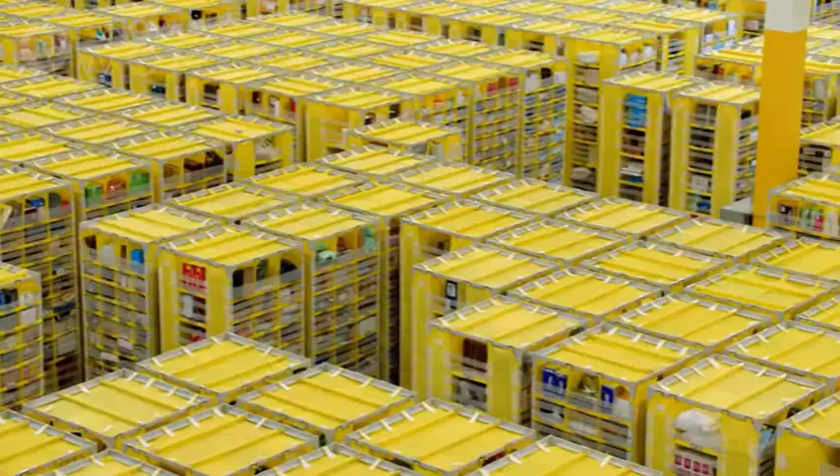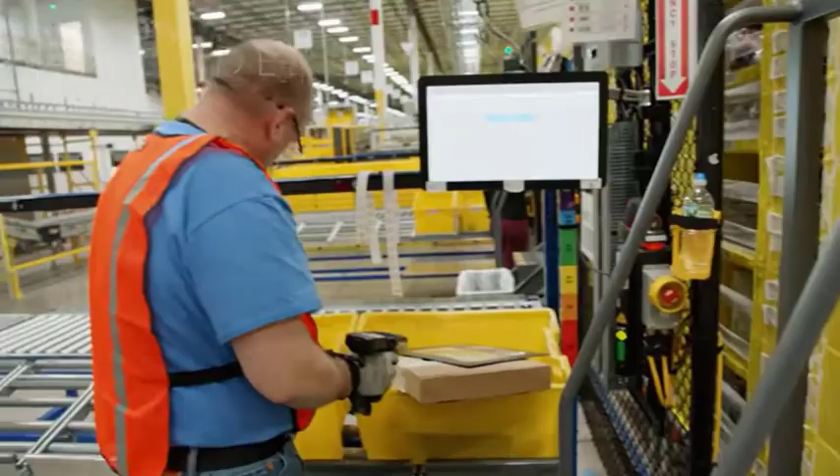To deal with that scale, Amazon has built an army of robots. Like a marching army of ants that can constantly change its goals based on the situation at hand. So our robotics are very adaptive and reactive in order to extend human capability to allow for more efficiencies within our own buildings. And there's plenty more where those came from.

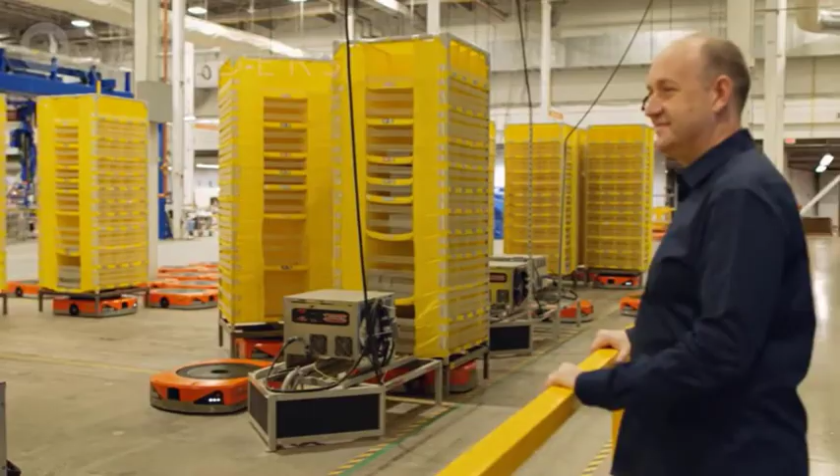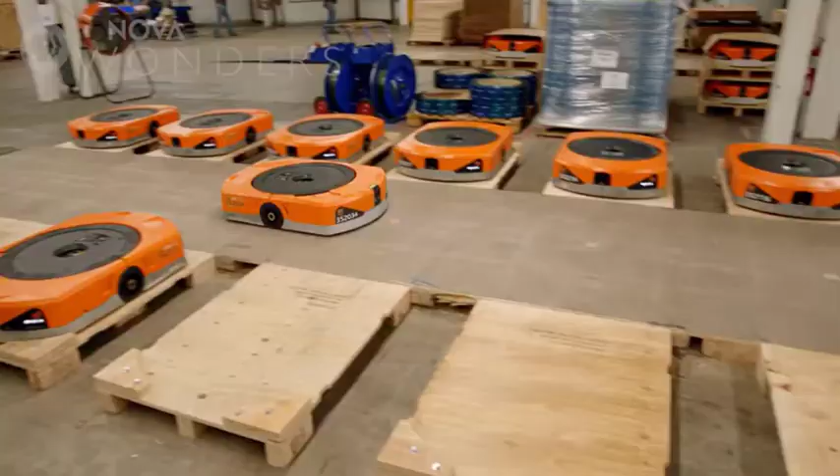Every day, this facility in Boston graduates a new batch of machines. All of the robots that you see moving the pods have been built right here in Boston. I call it the nursery, where the robots are born. They'll be built, they'll take their first breath of air, they'll do their own diagnostics. Once they're good, they'll line up for robot graduation, and then they will swing their tassels to the appropriate side, drive themselves onto a pallet, and go directly to a fulfillment center.

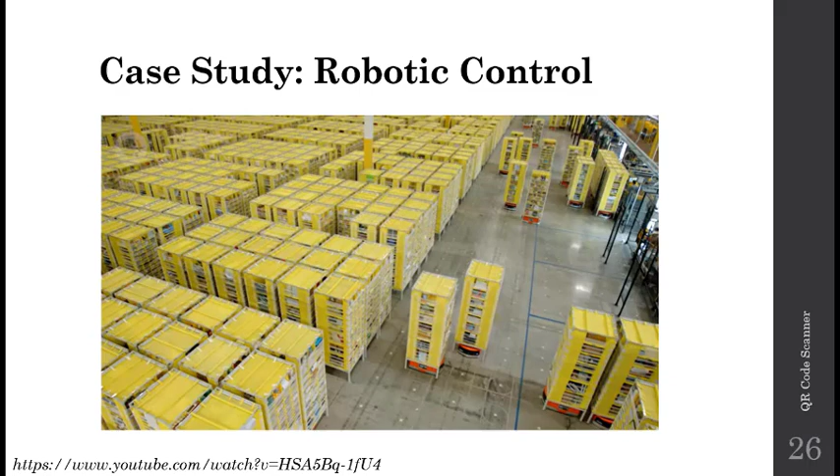You may have noticed in the preceding video, the floor of the Amazon warehouses are littered with these QR codes. It's the information encoded in the QR code that is read by each robot, and that information permits the robot to localize itself within the warehouse and drive the product from one area of the warehouse to the next. The ability of the Amazon robotic platforms to perceive the QR codes and utilize the information encoded in each is vital to their business model and the success of their warehouse operations.

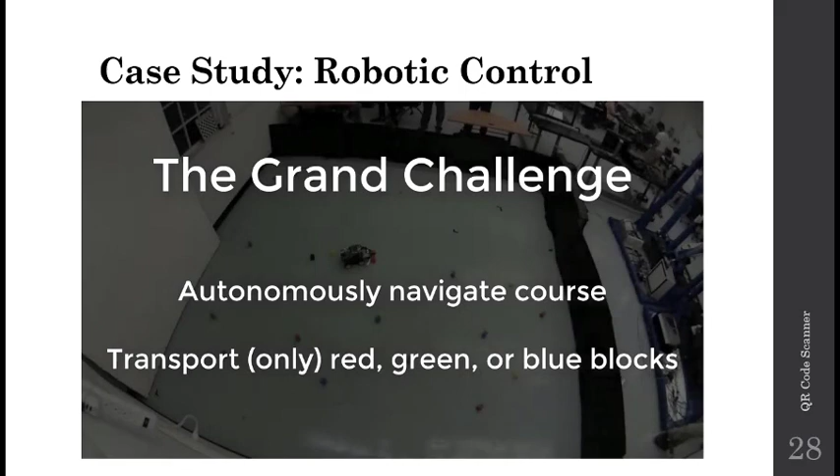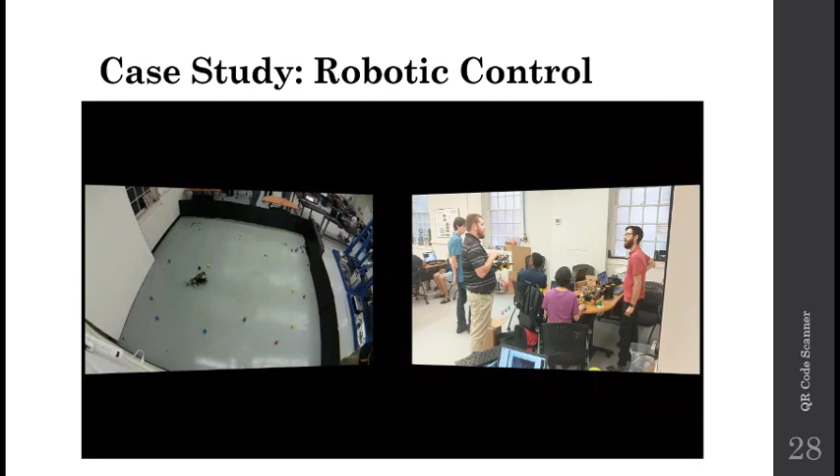Let's take a look at another robotic platform. Here I'm showing an overhead view of a small four-wheeled robot autonomously traversing a Grand Challenge course. This is the robot that is the focal point of my graduate robotics course. As part of this case study, we'll take a look at utilizing QR codes to control various aspects of this robotic platform.

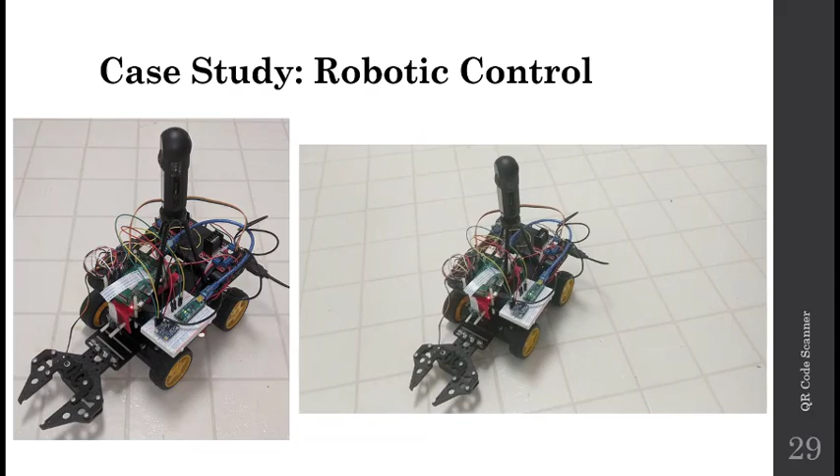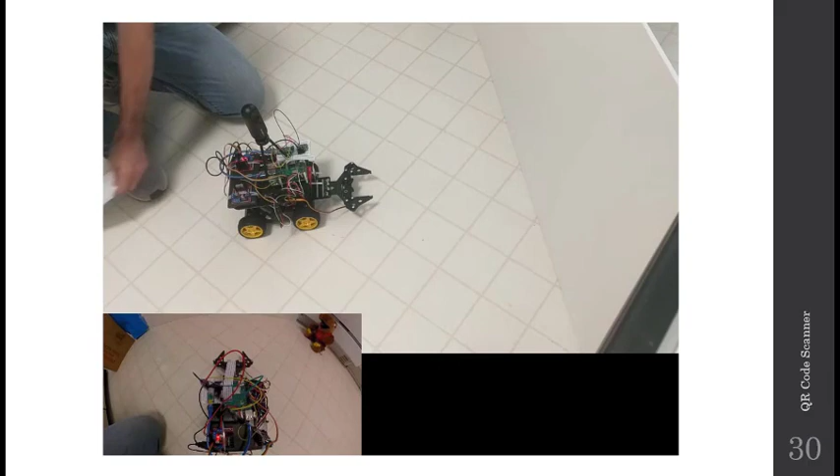Here I'm demonstrating the use of QR codes to control the position of the gripper. The camera connected to the Raspberry Pi in front of the vehicle perceives the presence of a QR code. The Raspberry Pi algorithm decodes the information contained within the QR code, and we use that information to command the servo motor. This in turn controls the position of the robotic gripper. Here I'm showing 3 different positions: fully open, halfway open, and fully closed.

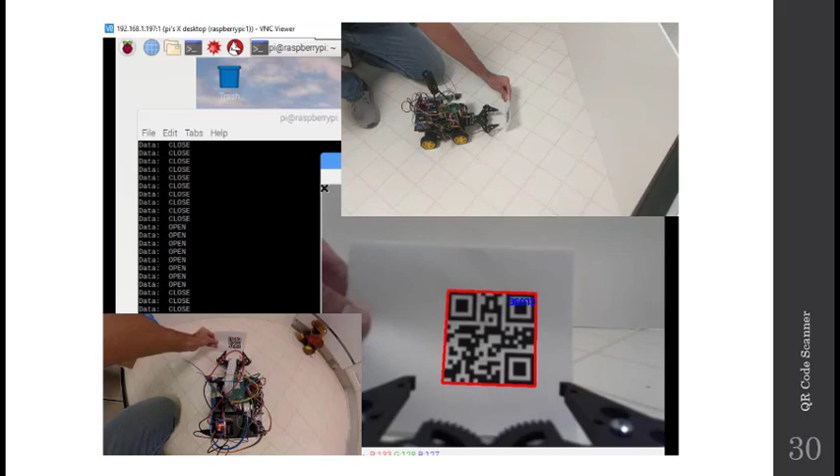Let's dive deeper into this control algorithm and take a look at how we're utilizing these QR codes to control the position of this robotic gripper.

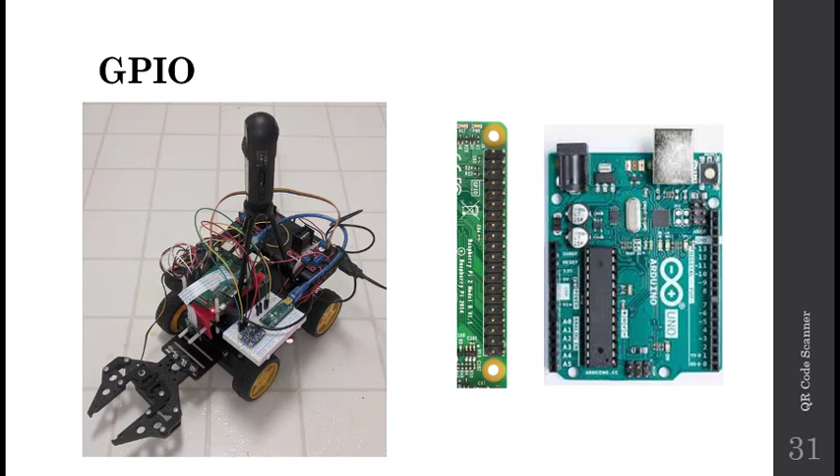The servo motor mounted inside of this robotic gripper is controlled through the use of the GPIO pins on our Raspberry Pi. GPIO stands for General Purpose Input Output, and you can think of them effectively as digital pins. They're either high at 3.3 volts or low at ground. These pins can be controlled by the user through software and enable a variety of applications, such as the generation of pulse width modulated outputs, I2C protocols, and serial communications.

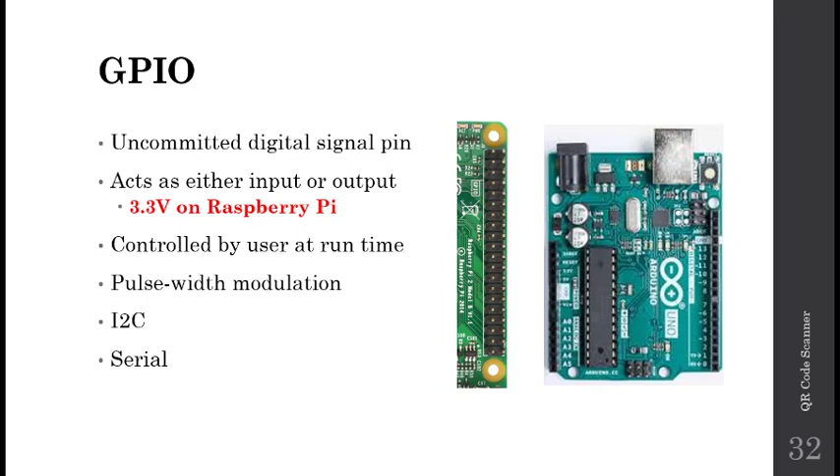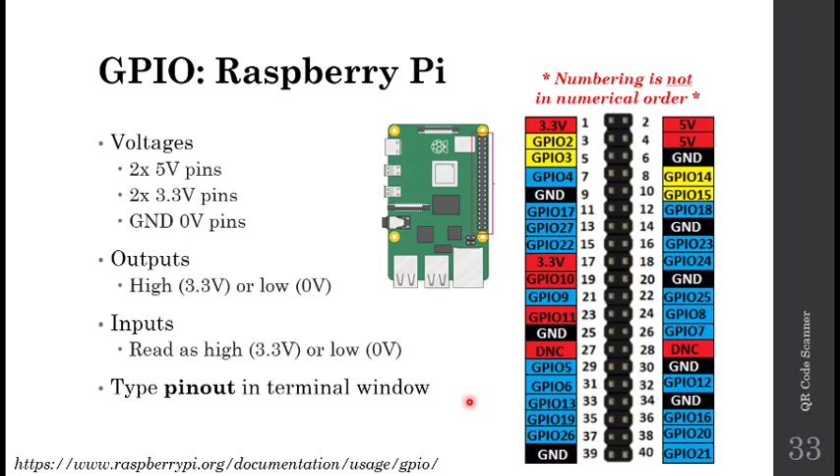For the details on this pin diagram, feel free to type pinout in a terminal window and hit enter. I'll also mention that a variety of hats are available for the Raspberry Pi GPIO pins. Here's a nice one that tells you the pinout diagram. You can just lay this directly on your Raspberry Pi and utilize this information.

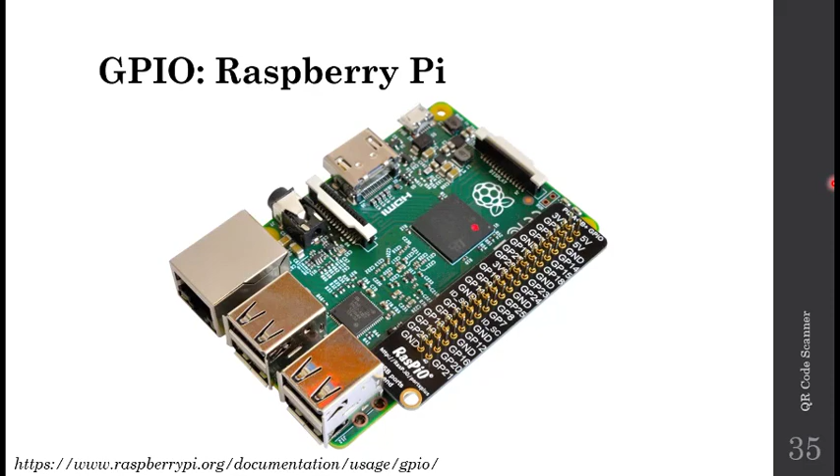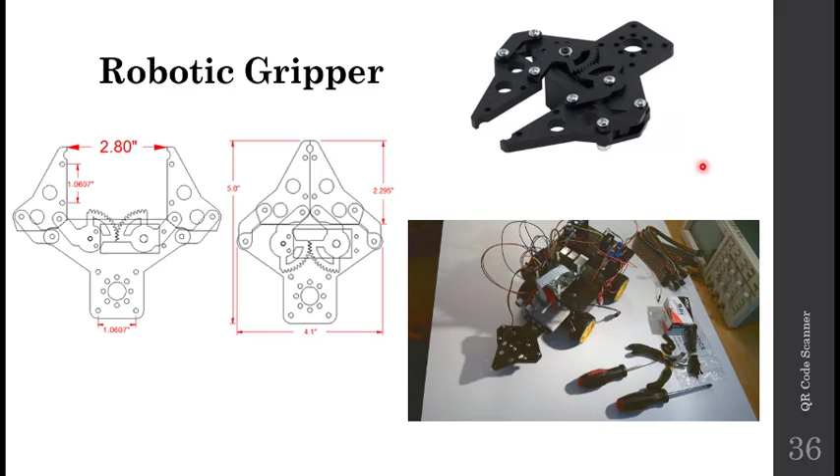The robotic gripper is composed of a standard servo motor along with a variety of 3D printed parts and attaching hardware. Here's a completed assembly of the gripper, and you'll notice based on these arms with geared teeth here, the position of the robotic gripper, this being fully open, this being fully closed, is entirely dependent on the angular position of the servo motor. So our ability to control the position of the servo motor allows us to control the state of the robotic gripper.

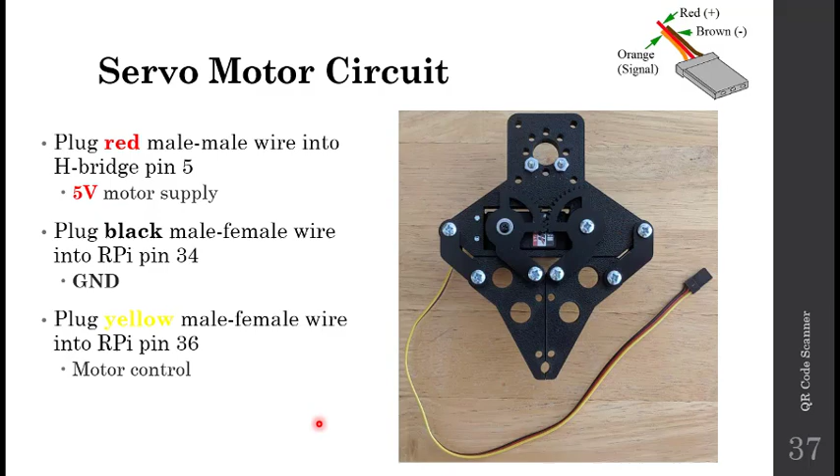Through the mechanical linkages of our robotic gripper, that will control the state of the robotic gripper. The control signal that we generate on the GPIO pin will be a pulse width modulated output. When it comes to the control of a servo motor, the primary aspect of the control signal we are focused on is the duty cycle.

The duty cycle of any signal is the time high divided by the full period of the cycle. It's very standard for servo motors to operate with a period of 20 milliseconds, so that'll be a 50 hertz pulse width modulated signal.

For this particular servo motor, a duty cycle of 5% will drive the motor to the full left position. A duty cycle of 7.5% will drive the motor to the full center position, and a duty cycle of 10% will drive the motor to the full right position. Now these are the numbers provided in the datasheet for this particular motor. We see that when we build the robotic gripper, due to tolerancing, each motor is slightly different, so we'll have to adjust these numbers accordingly.

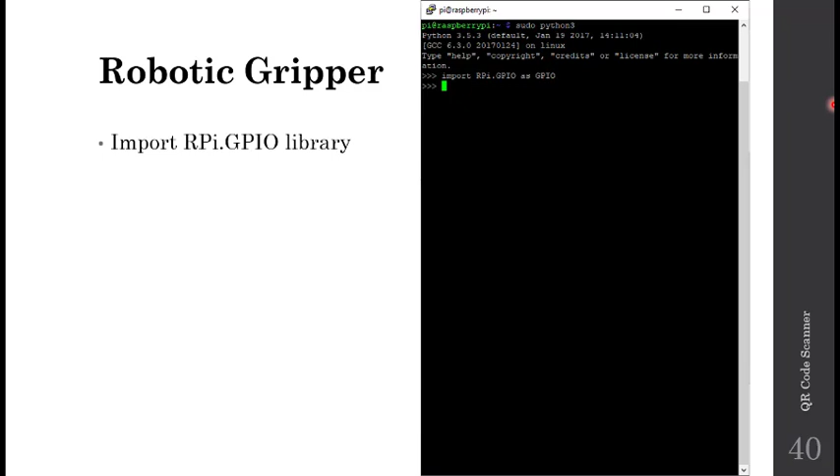With our robotic gripper assembled and wired, we'll enter a Python 3 shell and import the GPIO library. That'll be import RPi.GPIO as GPIO, this capital GPIO being the alias we'll use for this Raspberry Pi GPIO library.

We need to define the GPIO pin as an output that we'll be using to control the position of the servo motor. So on physical pin 36, I'll define that as an output. First, I need to tell the Raspberry Pi the configuration of the board, so I'll run a GPIO.setmode as GPIO.BOARD. That will tell the Pi to use the physical pins to denote the layout of our GPIO pins.

We'll then set up physical pin 36 as an output. That'll be GPIO.setup, 36 being the pin number, GPIO out denoting an output on that pin. We'll be outputting a signal with pin 36.

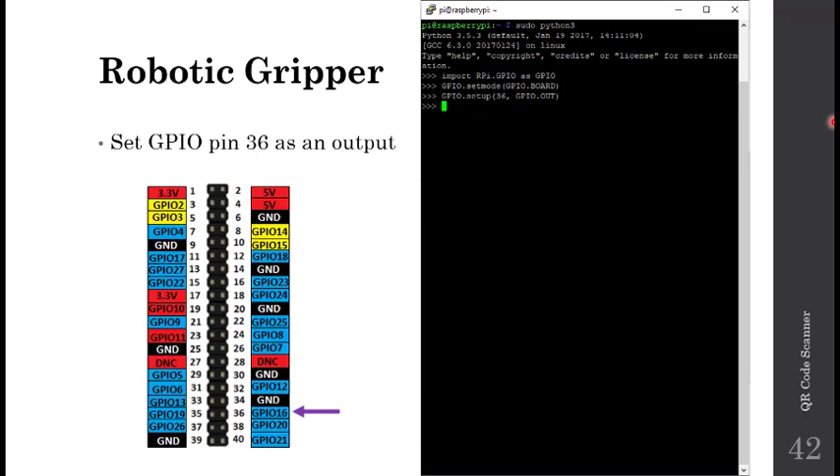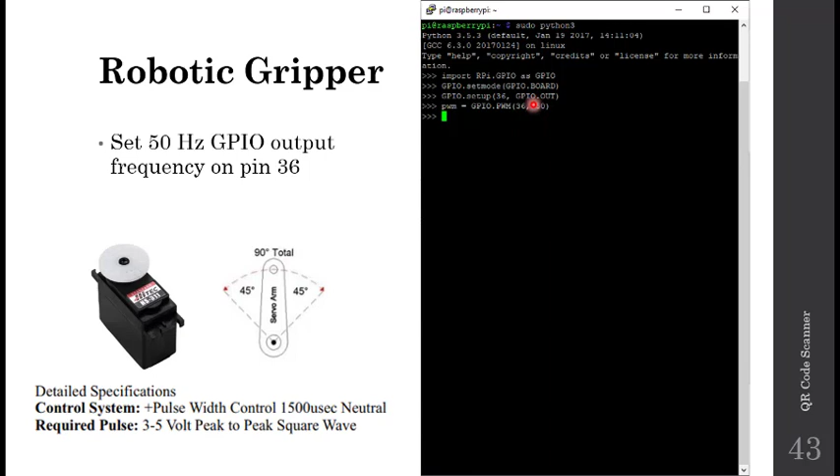We'll then define that PWM signal, the pulse width modulated signal. Recall we require a frequency of 50 Hertz, a period of 20 milliseconds for this particular servo motor. So we'll set PWM equals GPIO.PWM, using the PWM functionality inherent in the GPIO library, and we'll define on pin 36 a PWM signal at a frequency of 50 Hertz.

Let's go ahead and start the PWM signal at a duty cycle of 5%. So PWM.start will initialize the output of a pulse width modulated signal at a duty cycle of 5%. Again, that being time high divided by the full period of the cycle, equal to 5%, where high will be 3.3 volts and low will be ground.

If we change the duty cycle of that pulse width modulated output, we'll drive the servo motor to different angles and thus open and close the robotic gripper. So we can run a PWM.change duty cycle, and the input to that function will be the updated duty cycle we'd like to output to the servo motor.

For the robotic gripper I'm showing in this presentation, full left required a duty cycle of 3.5%, full right requires a duty cycle of 7.5%, and the center position is at 5.5%. You'll recall that's slightly different than the manufacturer's specifications, and that ultimately comes down to tolerancing from one motor to the next. Once we're finished, we can go ahead and stop the output to that pin by running a PWM.stop.

That'll effectively set that pin down to ground, and then we'll go ahead and clean up the GPIO pins. GPIO.cleanup sets all of the GPIO pins on the Raspberry Pi as inputs, in an attempt to prevent us from accidentally sending an output signal and damaging something connected to our Raspberry Pi.

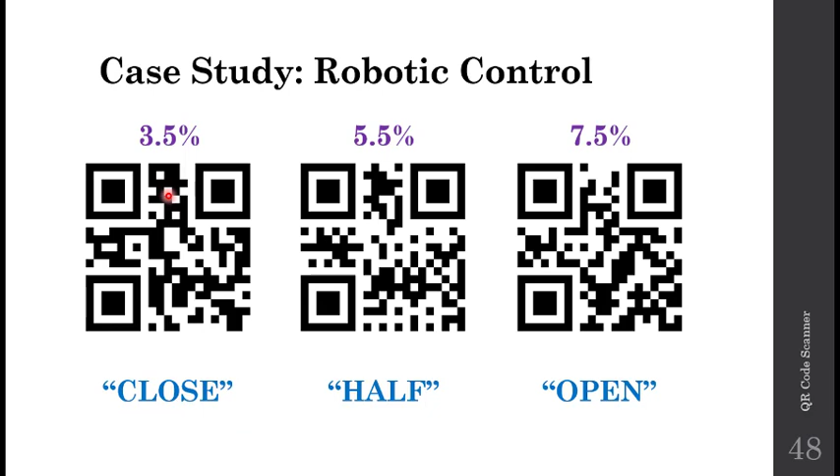To begin, I'll copy our QR code 01.py script generated in earlier lectures and modify that script. So here I have a copy that I refer to as QR code 02.py, and I'll sudo nano into that script.

As you see here, this script is largely similar to QR code 01, except that now I've imported the RPi.GPIO library, enabling me to command the state of each GPIO pin. I've set up the GPIO pins according to GPIO.BOARD, the physical layout on the board, and I've identified pin 36 as an output, which I'll use to generate the control signal sent to my servo motor.

Here I define the PWM signal that'll be on pin 36 with a frequency of 50 Hertz, and I initialize that at 5.5% duty cycle.

As was the case with QR code 01, I will open up my video capture and define my QR code detector, and then I enter an infinite loop where I'm constantly attempting to detect the presence of a QR code. In the case where a QR code is detected, I'll draw the bounding box around it, and based on the strings I've generated, I'll use those strings to define the duty cycle with which I'll change the pulse width modulated signal.

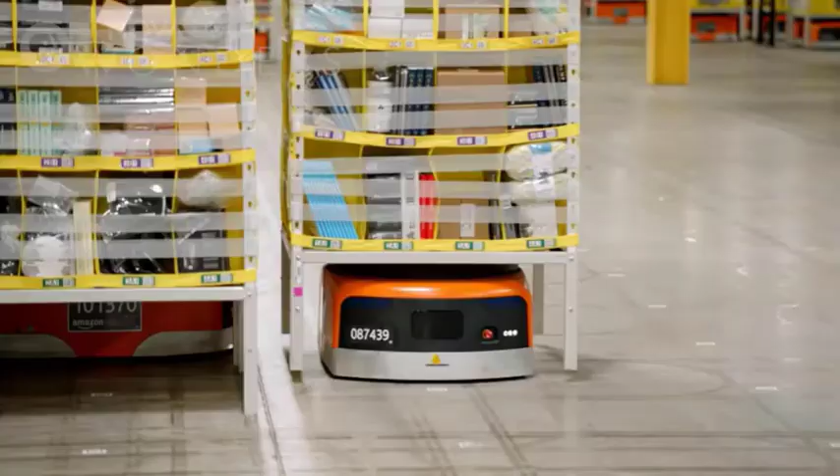This functionality can then be utilized for both the control of the robotic gripper as well as the vehicle itself, in terms of controlling the wheels. So if we were to place QR codes around the Grand Challenge Arena, we could use that to localize the vehicle, and use that information to command it to drive to its next position, in a similar fashion to how Amazon warehouse robots use QR codes spread across the floor to localize their position and command the vehicle to drive to its next destination.

That wraps up part 3 of our lecture series, taking a look at how to use our Raspberry Pi Plus camera to create our very own QR code scanner. In this lecture, we evaluated a case study where the perception subsystem of a robot consisted of a Raspberry Pi Plus camera utilized to detect the presence of, and decode information contained within, QR codes in its environment.